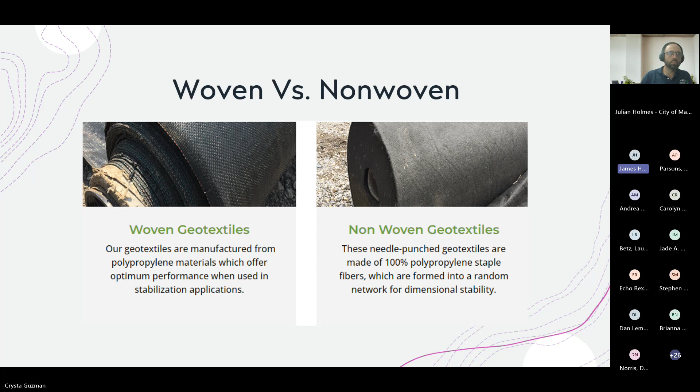Basically everybody knows these by now. On the left you have the woven, that's your typical fence. On the right is going to be the non-woven. Most of my descriptions I pulled off of a company website, so I'm not endorsing anybody, but they do have some good examples of describing different types of silt fence. North Central Texas, I'd say all the municipalities that I know of use the woven silt fence.

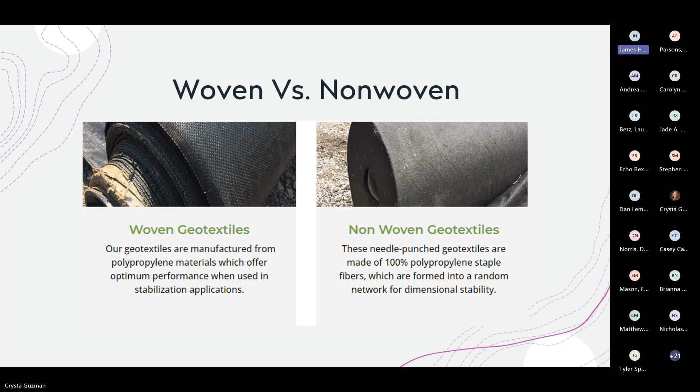So I'm ready for the next slide. Here are a couple different descriptions of the non-woven and the woven. I felt like this is a good way to start it off, but basically town of Prosper was looking at the permeability of the fence - so how fast is it letting the water through. Your typical woven silt fence is going to do a really good job of holding the sediment and the water back, but it's not so good at letting the water leak through and kind of go through the fence slowly, which is what we were looking for.

And so I started down in Austin, I was there for a good 2 years, and this is the type - the non-woven silt fence - that Travis County, I believe city of Austin, requires everybody to use. So I really liked it when I was down there. I had a supervisor go down for a family vacation, and he was looking at the fence, and we kind of went over pros and cons and what we want for Prosper.

For us, one of the major issues that we had was after heavy rainfalls, sites weren't dewatering properly, and it was difficult for us to go and check everybody and make sure they had their dewatering bags or different controls, the dissipation pads, to make sure that the dewatering requirements were met. So one big decision maker for us was the fact that there's going to be less dewatering needed because the water is able to flow out at a faster pace through the non-woven silt fence.

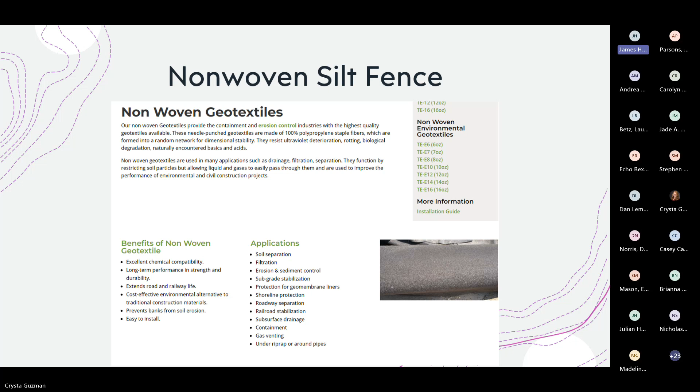Permeability, less dewatering, and I really like the non-woven because it has other uses. You can get a bunch of this material and make silt fence out of it—it's the same material placed under the construction exits, underneath the rock there. You can make it into a dewatering bag; it won't take any chemicals out, but it's good for straight soil dewatering. You can also place it on top of bare soil to help erosion, turning it into an erosion control blanket. That multi-use also helps, and that's how I sold it to some of my job sites—saying, hey, you can stock up on this or have your erosion control company use it for different things, so you don't have to use a bunch of different products if it's effective on a job site.

So now I have a couple examples. If you look at the bottom of the non-woven fence, you can see it's starting to even grow algae and some plants in there. These photos were taken recently after storm events—this one is from March 28th. We had a huge storm and it's been leaking water slowly long enough that the other side is just about dry. Even when it gets jam-packed with sediment, the fence still allows that water to settle down to the bottom and flow out pretty effectively.

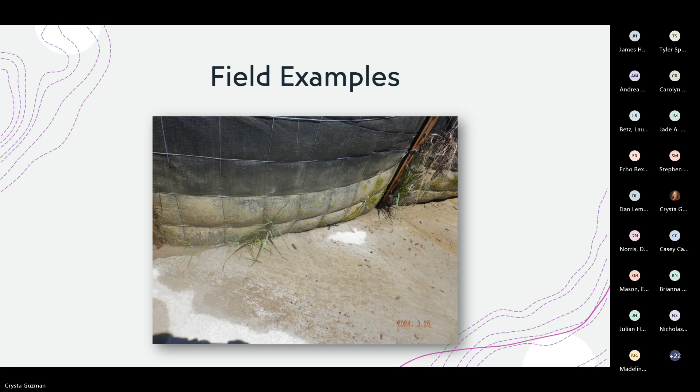Here's the other side of that first picture. So you can see one pushback that we got was the strength of the fence. And the woven silt fence is stronger, but from what I've seen from field application and use, the nonwoven is actually able to withstand heavy rainfalls with large amounts of sediment.

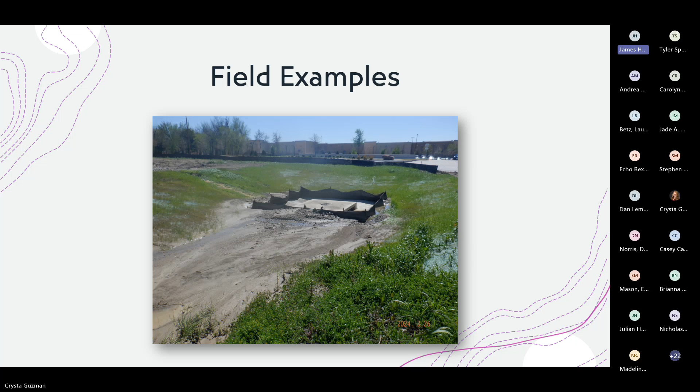In this photo, around it, we have some pretty good erosion control blanket. They did some seeding, but upstream, on this side of a roadway, one of our big road projects, they had some rock check dams and different controls that blew out during the storms. You can see the amount of sediment that ran down this channel, and that fence held up. For me, this is one of the best examples I have to show that it really does have strength, as long as you have other controls in place, to do a similar job as far as standing up to heavy flows and heavy sedimentation compared to the woven silt fence.

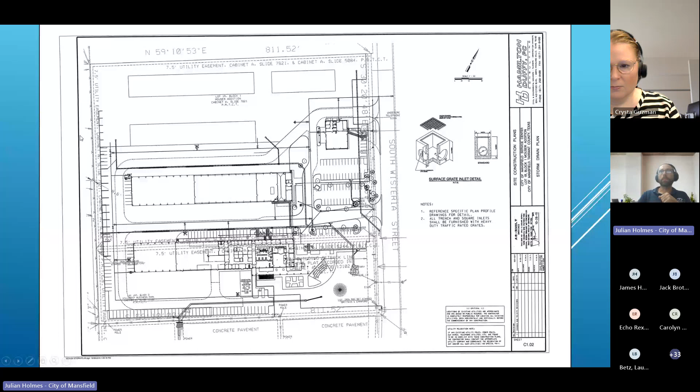The way it was designed, we use iSWM for our water quality. So it was designed to treat the 1.5-inch rain event, or the water quality volume. And it was designed with a concrete forebay. So the outfall is submerged, but then it flows into a concrete forebay and then out from that and into the pond proper.

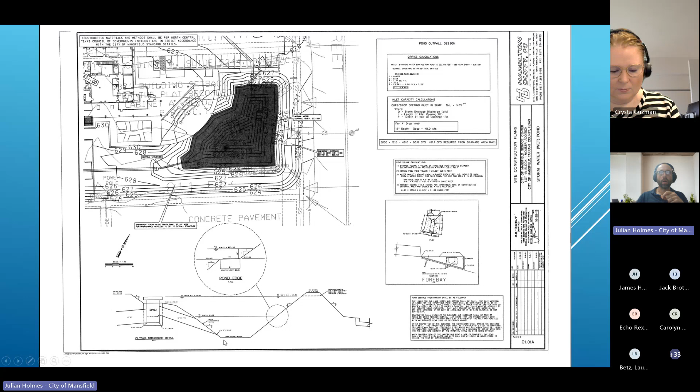It's also stocked - our Parks Department keeps it stocked with fish, and residents are encouraged to come and take advantage of that. We've got a place here for them to dispose of their fishing wire, and that helps with the biological uptake and just the general health of the pond. So there's some synergy there that we're providing citizens an opportunity to enjoy it.

As far as inspections go, I developed an inspection sheet in a form that we use called iForms. It's the same app that I use on my iPad to do my construction inspections. I just built a separate form for it based off of 2 different sources: one is the iSWM Site Development Technical Manual, and then the other resource is the EPA's Stormwater Wet Pond and Wetland Management Guidebook - their recommendations are very similar.

There's mowing - they want you to mow the slopes of the pond and around it, and of course you're checking for dumping and litter and that sort of thing. And then you're checking for vegetation. There's a recommendation that if vegetation is over, I think, 50% of the surface of the water of the pond, then you need to start removing it. I'll come back around to where we landed on the need for vegetation.

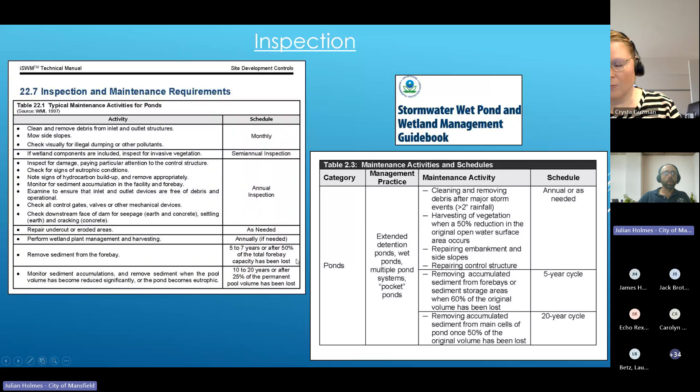You're checking for erosion around the slopes and around the outfalls. And then you're checking the forebay. iSWM says you should be clearing out your forebay every 5 to 7 years, or after you've lost capacity in the forebay, and that's very similar to what they were saying over at the EPA - it's a 5-year cycle, or when 60% of the original volume is lost. But that's difficult to determine how much sediment is in the forebay without pumping down the pond. There is a way to inspect it with a depth rod.

You just insert it into the water column and feel around until you find the top of the sediment pile, make a note of where that is, then drive it down through the sediment and find the bottom. Then you do the math and figure out how many feet of sediment you have in your forebay or in your sump.

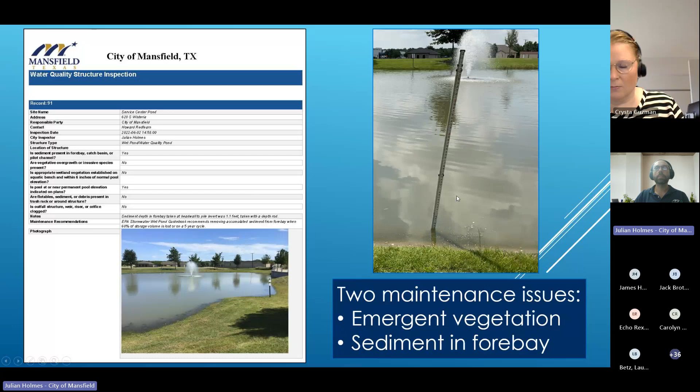My first stab at this was to work with our utilities department and see if we could do this without spending any money on a contractor. So I worked with a crew from utilities to pump the pond down. They brought over one of their pumps, and we set that up with a kayak that I borrowed from our parks department.

We have an Oliver Nature Park, which has a public education program, and they do some kayaking in Walnut Creek and whatnot. So I borrowed one of their kayaks as a float so that we could draw the pond down from the surface and continue to move the opening of the hose out as the pond was drawing down, so we could keep drawing from the surface and not be discharging sediment.

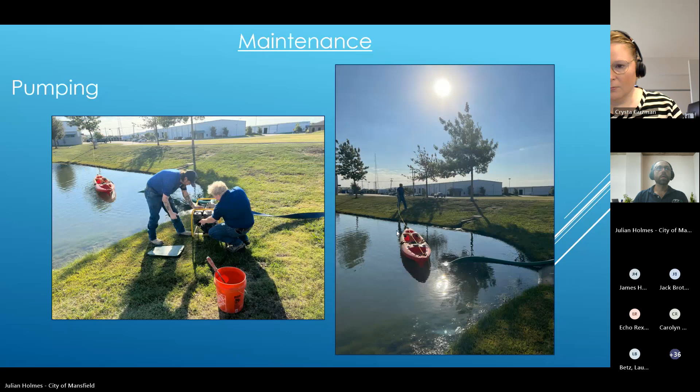So that worked. The kayak worked and it didn't cost us anything. And then we protected the outfall, the overflow. This is actually the overflow structure for the pond. So we were pumping into the overflow structure, which would go through some storm sewer pipe and then out and daylight off site.

So we pumped it into a vegetated area and then threw a straw wattle into the overflow. And then I walked over to where the storm sewer daylighted, and I just monitored to make sure there was no sediment being discharged. That was working well.

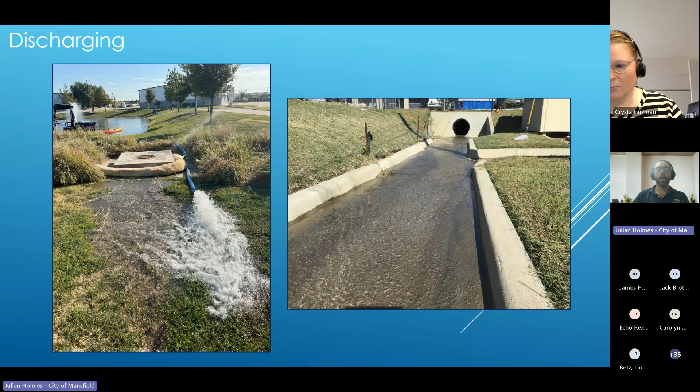We only really needed to pump it down to expose the forebay, so we didn't need to pump the entire pond down. But before we even exposed the forebay, we discovered there was quite a bit of sediment in the pipe, and the utilities guys were having some trouble pumping it because it was very compacted. So they had to spray it with water to loosen it up and then pump it out.

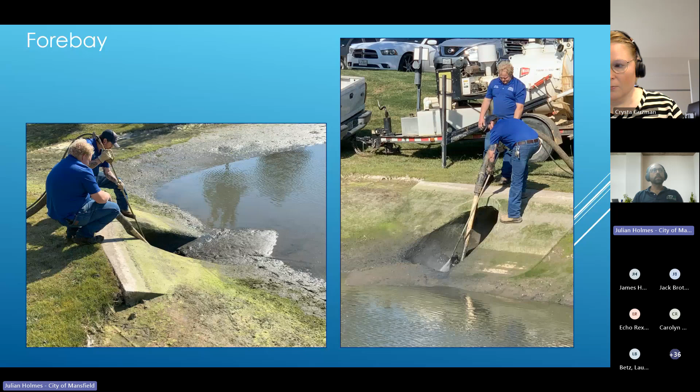One interesting side note, I discovered some debris in the pond. There were a few tires, about 4 or 5 of them, that had a cinder block wedged inside, which was very curious to me. We have a collection center that we operate where citizens can bring in tires and dispose of them. So I managed to pull one of the tires out of the muck and took it over to our collection center.

Dave, our collection center coordinator, was here when the building was built. He told me that the guy who stocked our pond with fish put the tires in there, and the cinder block was used to weigh the tire down to provide habitat for the fish.

I was griping and grousing about who would come to a city pond to dispose of tires and go to that much trouble to weigh them down with a cinder block. I was actually more than a little irritated about it, but he had the institutional knowledge and was able to say those are actually there on purpose for the fish. So I left the tires in there.

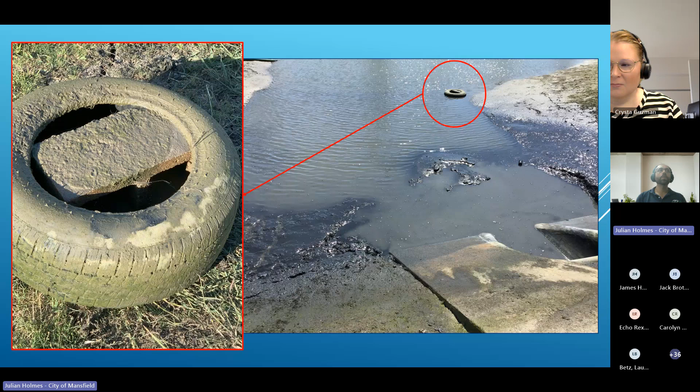So when we were pumping out our sediment and realizing some of the limitations of our equipment, we had this small vac trailer that really only holds about 500 gallons, while the volume of sediment in our forebay exceeds that. We were on our second load, having already unloaded one load of sediment from the vac trailer, when we realized there were some other issues as well with our equipment.

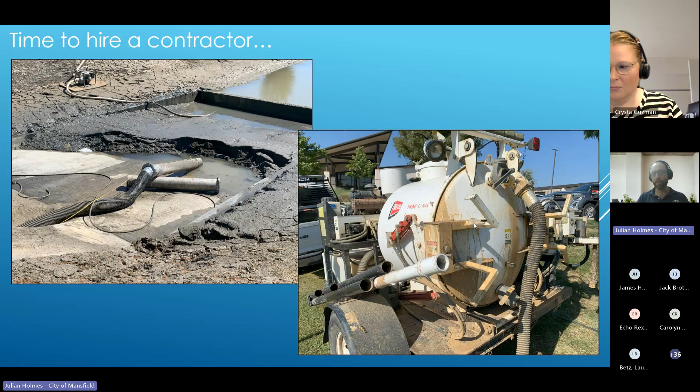We got the trailer stuck in the slopes of the pond and had to go get a backhoe to pull the whole rig out. After realizing how many trips and how much time it was going to take to empty this forebay out, and the other issues we were having with our equipment - I don't think utilities had a 4x4 hooked up to the trailer - we had to go get the backhoe to get it out.

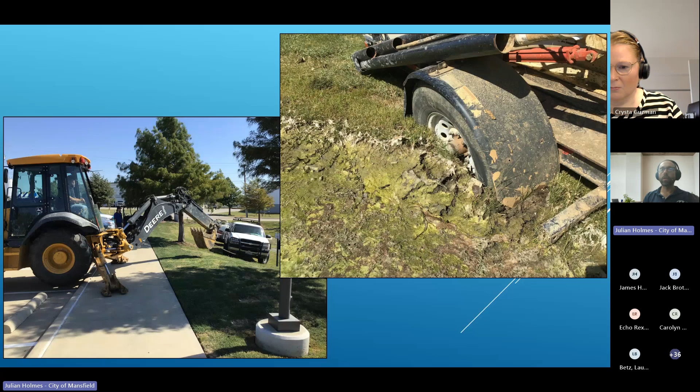We decided it was time to go ahead and reach out to a contractor. So we did - I don't think I've included any information here about who the contractor is. We're not endorsing any contractors, that's not what this is. I was just sharing so you can have an idea of what the cost was. We spent a little over $7,000 to have a contractor pump down and clear out that forebay for us.

That's what it looks like afterwards. So I've shown you that picture again, where I did my inspection with the depth rod, and you can see right here where I stuck the depth rod. There was quite a lot of sediment coming out of here and into the forebay. It really was quite a job, 5 years worth of sediment in that concrete forebay.

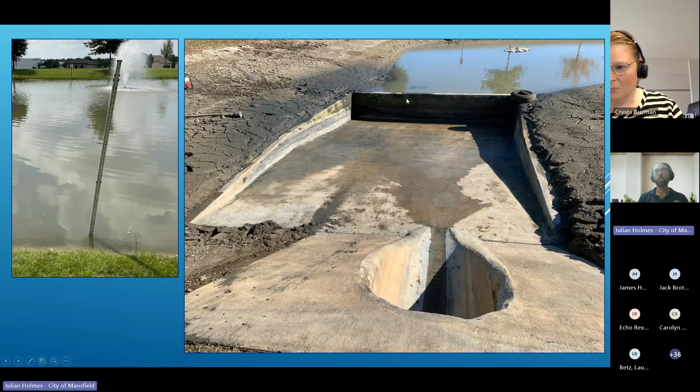Moving on to the vegetation requirements, these are details and cross sections from the iSWM Site Development Technical Manual, showing how a stormwater wet pond is supposed to be designed with aquatic plants on the aquatic bench. You are supposed to have a safety bench built into the design.

Just from my own experience working with development and contractors, they tend to just design a pond to be a big giant bowl, and you kind of have to fight with them to get components like this in, where you have a safety bench instead of just one slope, and irregular features and shapes around the pond. They tend to just want to make it easy for their equipment to move in, operate, get the dirt out, get it shaped, and move on.

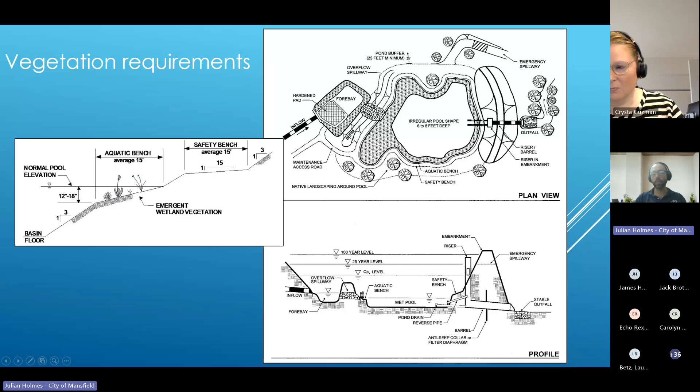But if you can manage to get that aquatic bench in there, then there's a place for the plants to take root, and that's the goal. You can see here with an earthen forebay what that would look like - you'd have the plants here around the bench, basically right under the surface, because a lot of aquatic plants need their roots submerged.

So looking for a supplier, we went to Texas A&M AgriLife's webpage. They have an aquatic plant nursery recommendation list, with several different nurseries you can reach out to. Again, the city is not endorsing anybody, so when I'm including the costs here, I have not included the information for who we worked with. You can see where the website is to find one near you or who you want to work with. But this is what we ended up spending, about $1,200.

They recommended these 3 different plants in these quantities: arrowhead, pickerelweed, and American water willow. Now, I'm not a horticulturalist or a naturalist, so I might not have identified them correctly. These are pictures of what the pond looks like today and what the plant life is doing now.

So just a disclaimer, I might not have identified them correctly, but arrowhead was one of the species we got. I don't know exactly which species it was because there are several different arrowhead species, but it was recommended because it attracts pollinators and its seeds provide forage for wildlife like ducks. You get more wildlife in a pond, it's healthier.

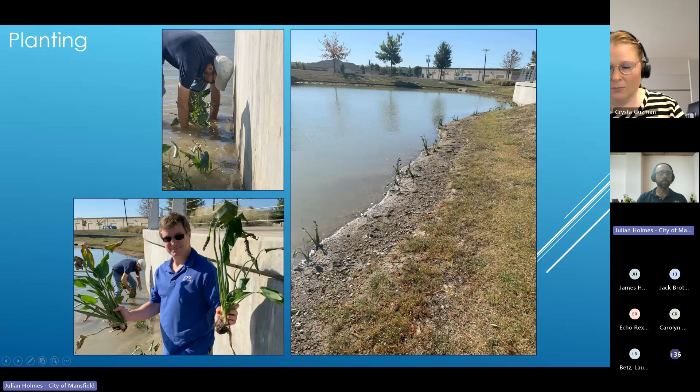So we planted it while the pond was still low. You can see the exposed slopes here from where we had pumped down the pond, and we had to get into waders and get in and plant the plants, driving them into the sediment on the slopes. And then we just waited.

And this is what the pond looks like now. I just took this picture last week when I was putting the slideshow together. So you can see, compared to what it looked like before, there was no vegetation under the permanent pool, but now it's come along quite nicely. I saw a lot of dragonflies out when I was taking these pictures.

So I think these plants are doing their job, and it's going to be a while before we have to think about removing or harvesting some of them. The guidebooks say you're supposed to remove or harvest the vegetation when it's at about 50% of the surface of the pond, and we're nowhere near it—we're not even at 25% yet.

So you can see how we planted it, right? Kind of just 2 years ago. We didn't have a ton of it; we just spaced it out and planted it like that, and then 2 years later it's coming along nicely. I did check the sediment in the forebay at the head wall.

I have about a half a foot of sediment. When I did that inspection in 2022, I think it was at like 1.5 or 2 feet. So it's already collected some sediment. Some of that, though, could have just been from when the pond is filling up—it's going to disturb sediment generally in the pond. So some of that sediment in the forebay could have just been from the slopes of the pond itself and not necessarily from the runoff.

Oh, no, not really, not historically. I will say that there was some algae along that aquatic bench before, and I would say there's probably less now. I think having aquatic plants would help because they take up nitrogen or phosphorus. But again, just like with the cattails, we haven't historically had an issue with the pond, and the pond isn't that old, so that might be a factor. We're also not dealing with residential runoff—this is more or less an industrial facility we're treating runoff for, so there's not a lot of nutrient. It would be more about hydrocarbons, I think.

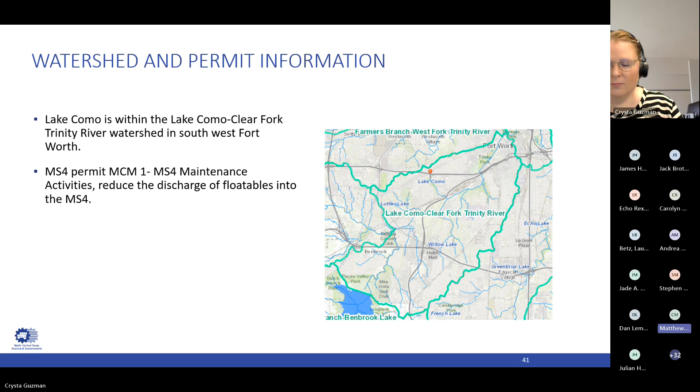So the way we did this—Lake Como is a neighborhood improvement project, and the lake itself falls into that. As part of the NIP, we contracted with an engineering firm to do a litter control assessment on the lake. Some of the other things we did for the neighborhood included a water quality assessment on the lake, fixing of the dam which we'll look at shortly, addressing code issues throughout the neighborhood, and sidewalk and street fixing, plus some street lights.

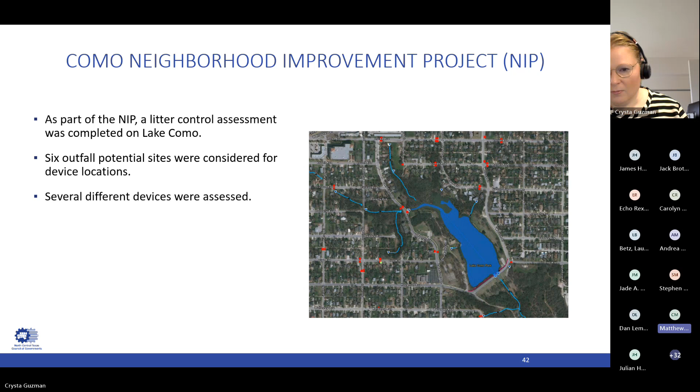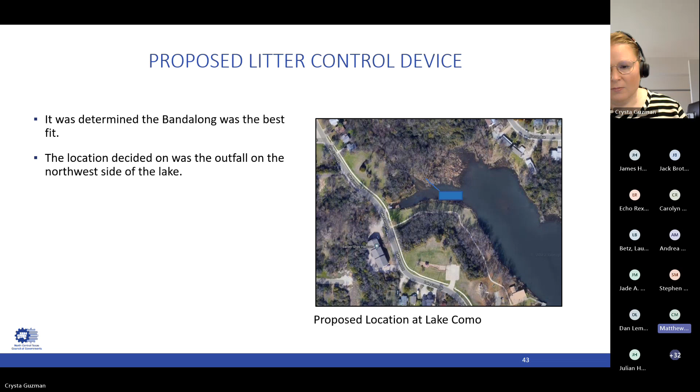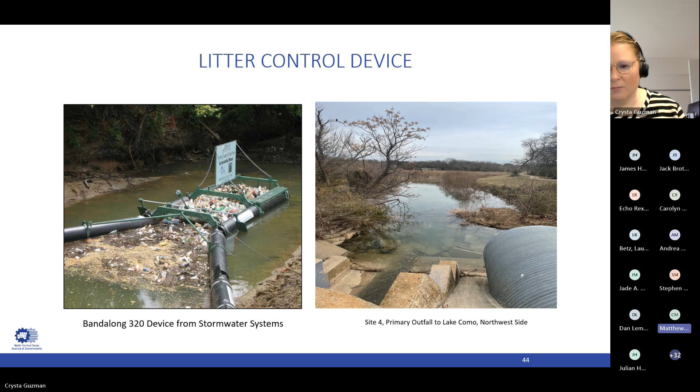When they went to fix the dam, they drained down the lake and left it drained so long that a lot of weeds grew where there was no water. When they allowed the lake to refill, all this vegetation was inundated, and they ended up having to take some of it out to get the Bandalong in. You can see that on the next one, I'm sure.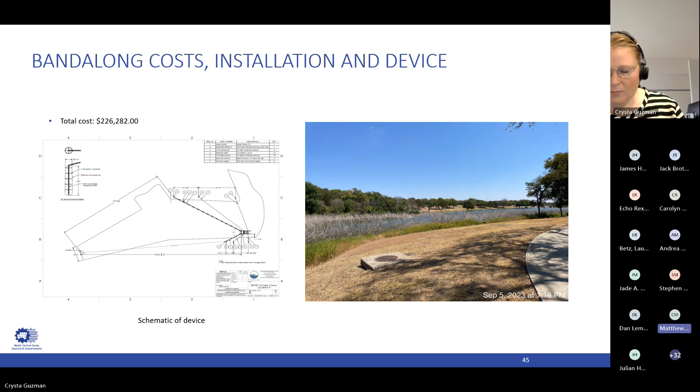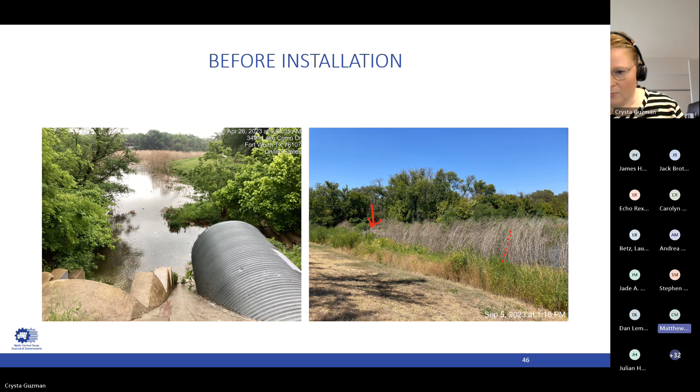You can see again along the edges where they re-inundated the lake, a lot of the vegetation is dead and ultimately had to be removed so we could get this stuff in. The next slide shows pictures before the installation—that's still the outfall area. The picture on the right, the arrow I added shows where a tributary comes in just downstream of the outfalls, and the dotted red line is where they're supposed to put the Bandalong. So the next picture slide.

So this is when the contractor showed up to put the Bandalong in. These are parts of the Bandalong in the picture on the left. They're looking at it and going, yeah, we're going to need to get all this dead vegetation out of here. So on the right, some of our specialists, along with a lot of other crew from Parks, and the contractor got in there to remove the vegetation so we could get the Bandalong installed.

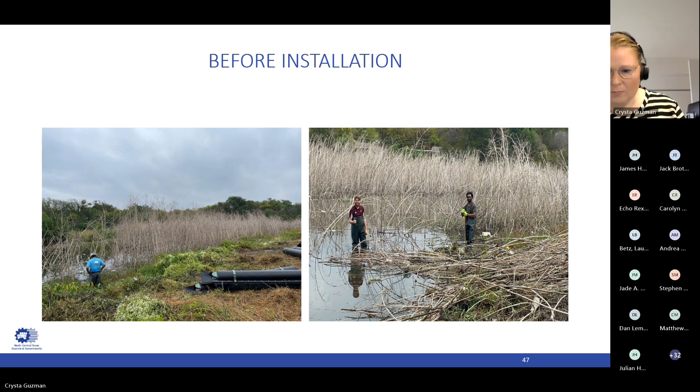So finally this was installed in September 23, and you can see that they've started the installation. You can see the piles of dead vegetation. In the picture on the right, you can see how dense some of that vegetation was going across the lake, at the top of the lake. I don't think they're planning on removing it right now. They're just going to let it naturally decompose.

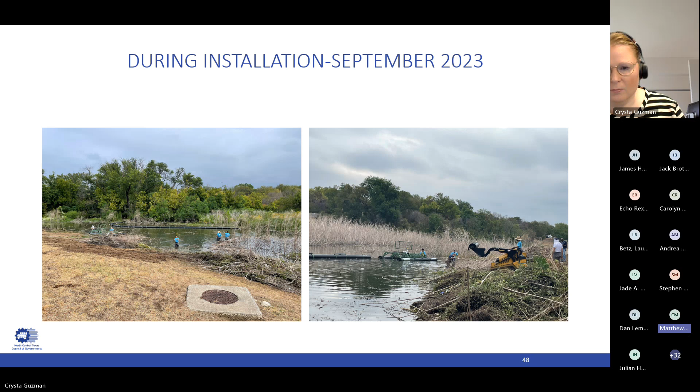So that's during installation, and this is what it looks like after installation. This is our Bandalong on Lake Como. You can see the arms capture the trash as it comes out down that channel, and it will go into the device, and Parks comes and cleans it out on occasion.

So to date, the next slide. I've talked to Parks, and they've had some issues trying to get the collections because of the location of it and how wet it is when they go to collect it. And then when it's dry enough for them to collect it, their crew is just scattered in so many different directions.

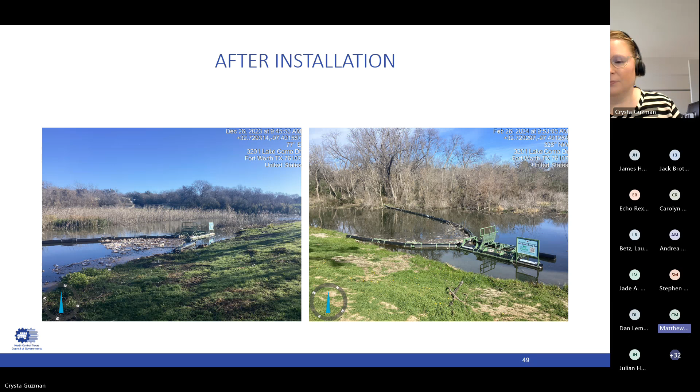Another question is, how did you fund this? Because 200,000 is a good chunk of money. Let me think, we had some from... we went through M&C, and they allocated money to the NIP, which is a neighborhood improvement project, and we used money from that, and then we also used money from Park and Rec, and some from environmental. It was a collaborative effort, let's just say.

Another question is, how frequently are you maintaining or removing the collected litter? Yes, it's city funded. We'd like to have it done after every major rain event, and we're checking it after every rain event. They're doing it as they can after major rain events. Like I said, it's been done 5 times since it was installed in September. We're working towards a goal of more frequent collection. That's one of the bugs that needs to be worked out still.